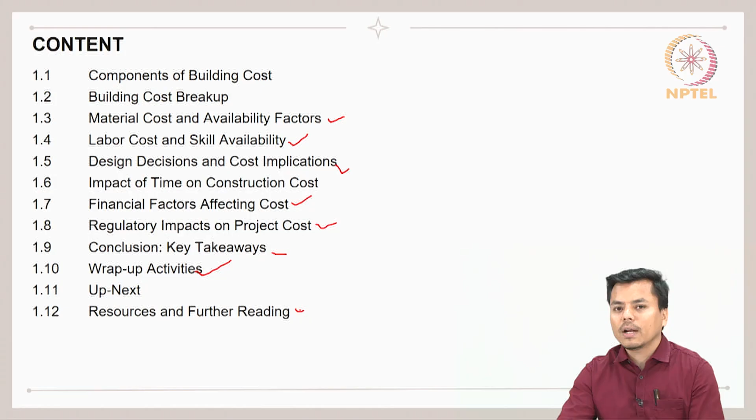Then financial factors that affect the cost, regulatory impacts, and then we will conclude this presentation with the summary and some wrap up activities at the end. Also I will try to give you a glimpse of the topics that will be covered in the next presentation. Thereafter some resources will be shared with you, which you can refer to and understand more on the particular topic.

To give you a recap of what was covered in the previous presentation, we emphasized low cost construction, and tried to understand the background: why low cost construction is needed and how it can be achieved without compromising safety, quality or building performance. Also we understood how rising demand and affordability gaps push the need for innovative construction solutions.

Then we also understood the concept of embodied energy and learnt that the hidden energy in material is a key factor in deciding the environmental impact of that particular material. So from that lecture you will have a greater understanding of the material to promote in a particular construction style.

Then the environmental impact of buildings was discussed, wherein different methods of construction or different practices were discussed. Then green and low cost solutions were discussed, and also the different rating systems that are available to determine the sustainability of any construction. That was also briefly discussed in the previous presentation.

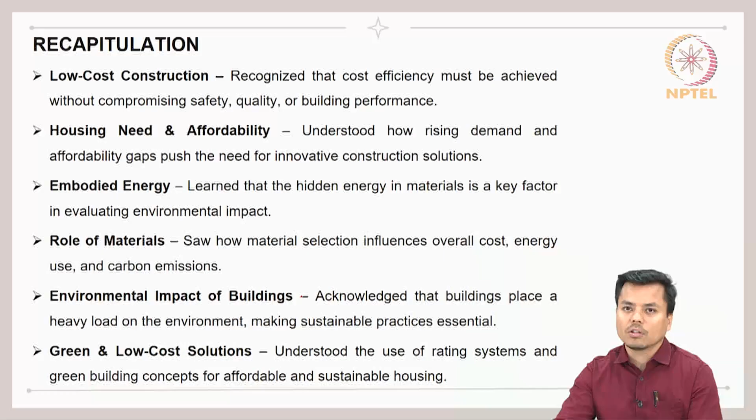Before this we had understood the need for low cost construction, and it was emphasized that the cost of construction is actually a major deciding factor in determining the affordability of a building. So let us now try to understand the components which decide affordability. The first and foremost, which has a higher share in the entire cost of construction, is the material cost, that is the raw materials used for construction.

Bricks, cement, steel, aggregates and finishes. These are some of the materials used extensively in construction, and they consume 50 to 60% of the entire cost. If we try to find and use alternate materials, like replacing cement and steel with locally available materials, possibly the material cost can be reduced by at least 20 to 30%.

The next is labor cost. It doesn't change much, but it is one of the components of the affordability of a building. For skilled, semi-skilled and unskilled workers together, the entire remuneration or salary being given to this labor is actually 20 to 30% of the entire cost of the building.

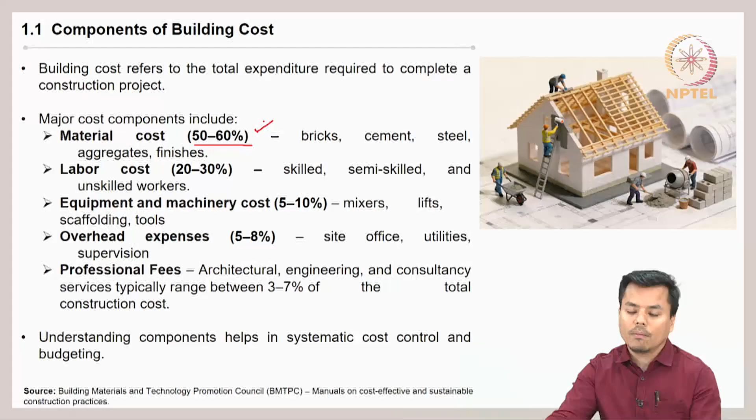Then the building cost breakup - the distribution of the total project cost. Typically, in a residential building, materials consume 50 to 65%, labor costs around 20 to 30%, equipment and formwork 5 to 10%, and contingencies 5 to 10%.

The cost breakup varies with building type. If you are constructing a small scale building with a simple design without fancy forms, the cost may be minimized. If the materials used are all locally available, the cost can also be minimized. If not, you have to bring materials from far off places, which increases construction cost.

Location is also an important factor. For example, constructing a building in plain areas versus high altitude areas - there is added extra cost while constructing in high altitude or extreme regions, like Leh and Ladakh, or Thar desert areas, or very dense forest areas. Projects built in isolated locations have extra added cost because there are no locally available shops from where you can purchase materials.

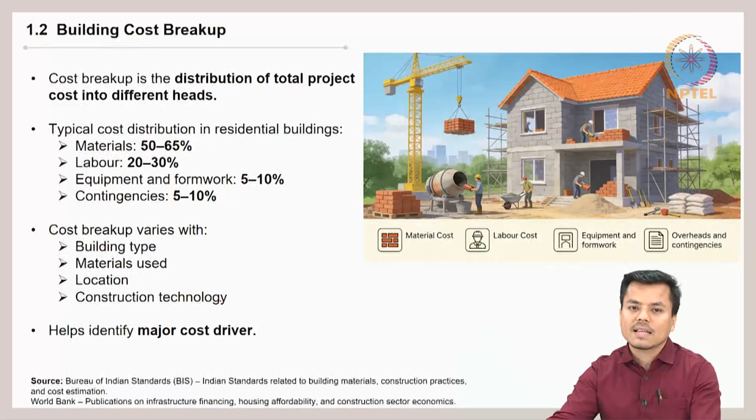So careful planning has to be done before the entire budget is prepared for the construction. With this analysis, it will help you decide the major cost driver of the project.

Talking about the material cost and availability factors from the previous slide, let us now understand it in more depth. The material cost is actually influenced by market price fluctuations.

For example, just now as I am recording, there is a war happening in Gulf nations. With that, there is difficulty in getting petroleum products and related materials in India, so the cost of steel and other associated materials like glass has significantly increased because of unavailability of specific raw materials.

So in that case, the market price fluctuates. But if that tension in the region is minimized, after a period of time the market price will gain, there will be no fluctuations, and it will be as it was earlier.

So that is where such conflicts and such sudden global issues create an impact on the market, and due to which the price fluctuates.

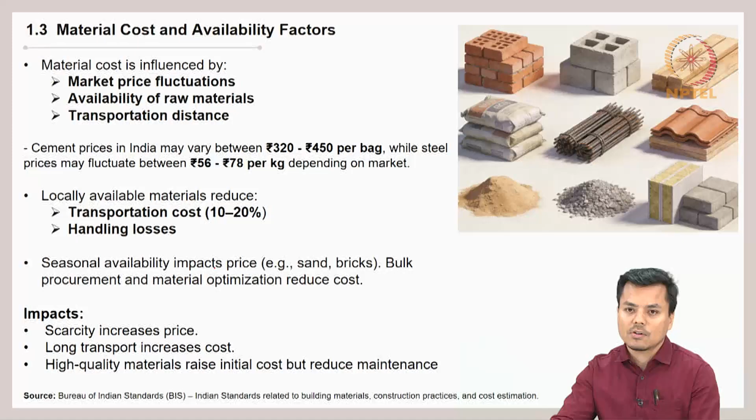That is what you have to understand. Then next is labor cost and skill availability of skilled labor. If there is a shortage of trained masons, then the labor wages increase.

Then regional wage rates vary from region to region. In regions where laborers are less available, the wage rates are higher. That is why in metro cities like Delhi, Mumbai, Bengaluru or Kolkata, the wage rate is very high for skilled labor compared to small towns and villages.

That is the reason, because there is a lot of construction happening, plus the cost associated with day-to-day spending is also very high in that region. Also, experts or laborers are not available locally, so you have to bring labor from other places, and that creates an imbalance in the wage rates.

Then next is productivity level. Skilled labor improves productivity. If you just use whatever labor is available, knowing they do not have expertise, a lot of mistakes may happen, and you may have to break the construction or demolish a part of a wall that is wrongly constructed, or a column that is wrongly constructed. So all that may happen.

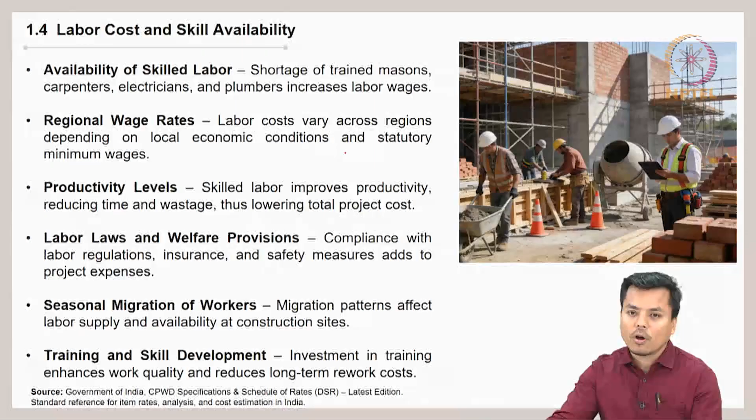Then training and skill development. Investment in training enhances work quality and reduces long term rework costs. If you can give formal training to laborers before a project, that will minimize some rework costs during the project. Then there are some design decisions and cost implications which have a major factor to play while minimizing the cost of construction.

The first is building form and geometry. If your building is very simple and can be easily designed, then in that context the cost of construction is lower compared to a very extravagant design with a lot of architectural features.

That will increase the cost of the project. So it depends on if you have good capital with you and you have to fulfill all your wishes, you can go ahead with the conventional way of construction. Low cost will not be a priority in that scenario, but where low cost is a priority and a factor to be considered, then possibly you may not be able to design something very extravagant, and sometimes the architectural features present may not be necessary.

Next is structural system selection, whether you are using RCC, steel, composite or load bearing systems. This affects the cost and also the construction time, so depending on that the cost is decided.

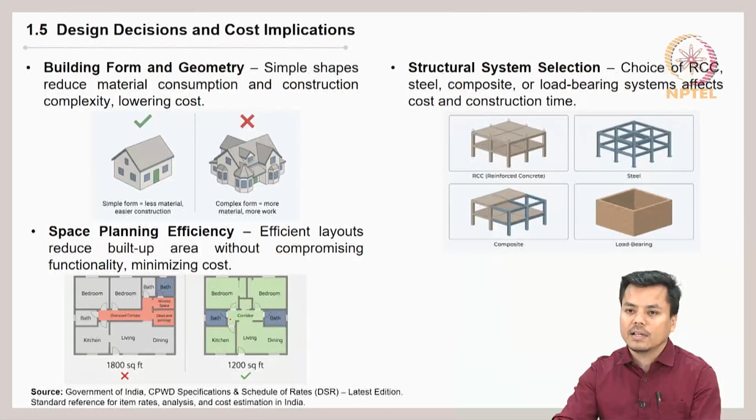The next is space planning efficiency. If you could design your space, for example as shown here, within a dedicated small space, you are able to have all the requirements of the client fulfilled. Possibly that will minimize the construction cost, because you are utilizing less built up area, with less wastage of spaces in terms of corridors and other circulation spaces inside the building.

Then other factors that decide construction cost are the choice of materials and finishes. With premium finishes, if you are using very high cost interior finishes, that will increase the cost of the project. If you are using sustainable design strategies like passive design, in the long term that will help minimize the cost of the building.

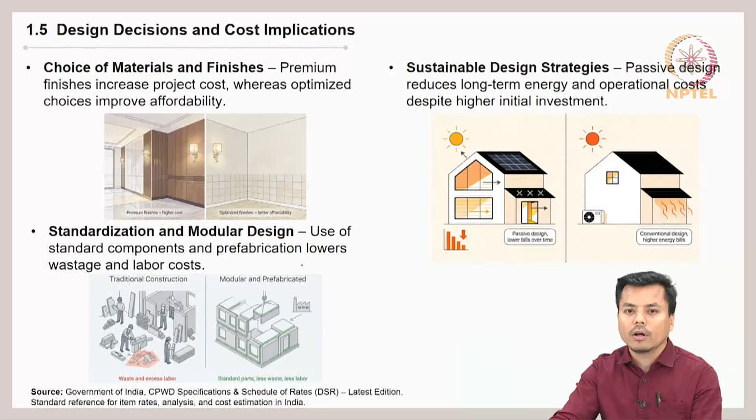Standardization and modular design, as I explained earlier, if you go for modular planning, or if you use prefab material, that is prefabricated material, then the cost of construction can be minimized.

Since the design decisions are understood, now we also have to understand the impact of time on construction cost. We have often seen in discussions in general public that a project which was supposed to be completed in 3 years gets extended for 5, 10, 15 years to complete.

And within that duration we also get to know that the cost of the project has doubled or sometimes tripled. For example, if a hospital was supposed to be designed within 5 years with a budget of around 50 crores, but if it is extended due to many issues, the cost of the project also increases, because the continuous use of machinery, continuous use of labor and associated expertise all adds to the cost of construction.

So if you are delaying the project, you are adding to the cost of construction by at least 10 to 15%. That is where proper planning of construction has to be done.

Then inflation and price escalation has to be understood. With this, at least 5 to 8% annually the cost of material increases. That is why generally it is targeted that at least for a small level of construction, it should be completed within 1 year. Beyond that, the cost of materials increases after a year, and there is a chance that you may have to suffer at least 5 to 8% annual difference.

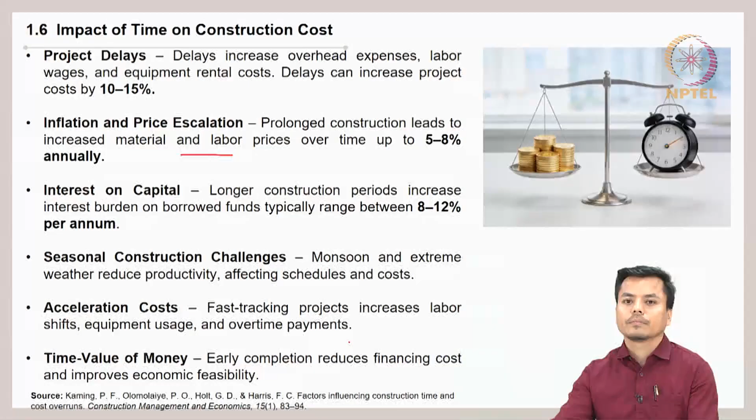Then the other factor to be considered is the financial factors, like interest rates. It increases month by month. Availability of credit, so that is also a question. If you are using loans, possibly you have to keep on paying the EMI of that construction if it is not finished in time. Cash flow management: efficient fund flow prevents work stoppages and avoids penalty costs.

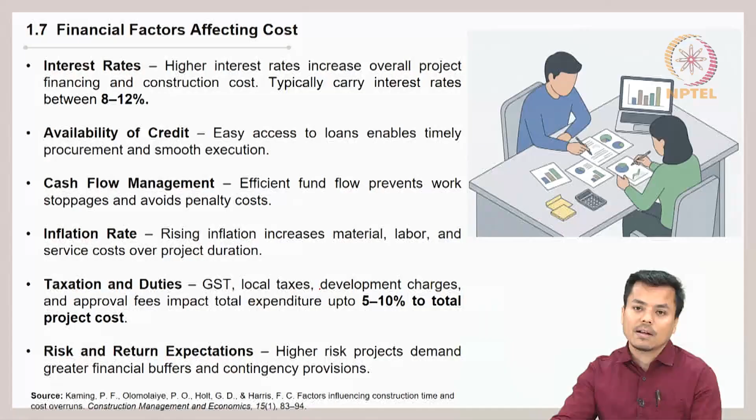That has to be ensured, that you are able to pay dues of the material and of the labor wages in time, or else they will stop working with dedicated interest and enthusiasm. So possibly then you may have to delay the project. Inflation rate: rising inflation increases material cost, labor cost and service cost. Taxation and duties, all these GST, local taxes, that has to be considered and has to be well thought in advance. Plus risk and return expectations have to be understood in case of financial factors of the cost.

Then the other factor that determines the cost of construction is regulatory impact, like building bylaws and development controls, like FAR, setbacks, height restrictions, all that has to be followed. If you do not follow these regulations, then possibly tomorrow if there is an inspection from the concerned building works committee, then you may have to pay fine for all the mistakes that you have done.

Environmental regulations, if these are not taken in advance, then due to litigation and all those court cases, your project may be delayed. Safety regulations, fire safety, structural safety, all that has to be ensured, or else it will delay the process, or at times it increases the construction expenditure also, but it is a good thing to do. Approval procedures and delays: lengthy approval process escalates cost. So that is why government is trying for a single window clearance for such projects, which minimizes delays in procedures.

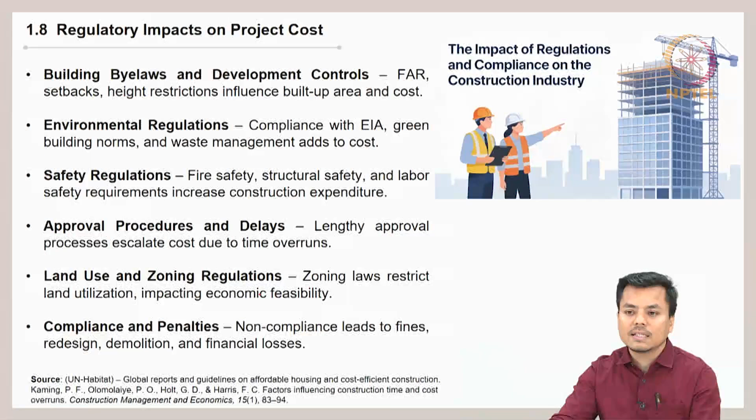Land use and zoning regulations, all this have to be understood, and where this project is going to be constructed, you have to have proper permission for constructing a building over there, or else it will go into litigation and then a lot of money is wasted in that. Compliance and penalties have to be understood for the particular project.

So to conclude the overall cost components and influencing factors, building cost is a multidimensional concept. It is not only thought that okay, the material cost is the majority, so I will always think of how I can reduce material cost. In that thought process, you may compromise on the quality of material, so that should not happen. That is why it is a multidimensional concept, and you have to think very well about all the materials and associated cost factors. Then efficient cost management requires holistic planning, integration with technical, economic and managerial considerations.

Material and labor availability significantly affects project feasibility, timelines and overall expenditure. Design decisions play a critical role in cost optimization, where simplicity, standardization, as I was mentioning, modular planning, all this helps you minimize the cost.

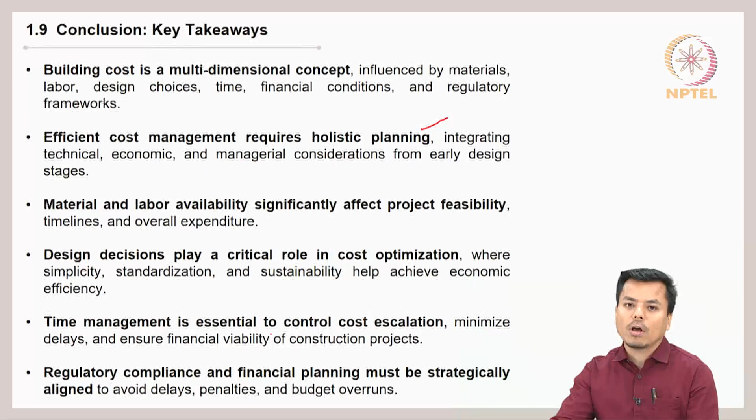Time management is essential, or else we have seen how, if we do not follow time restrictions for a project, it increases the cost of the project, because many things are associated with it: inflation, the interest rate, the capital that is borrowed. So all that will put further burden on the project cost. Regulatory compliance and financial planning must be strategically aligned to avoid delays, penalties and budget overruns for the project.

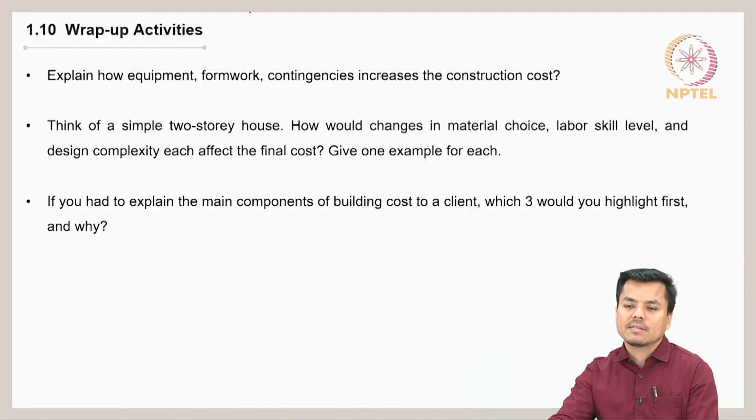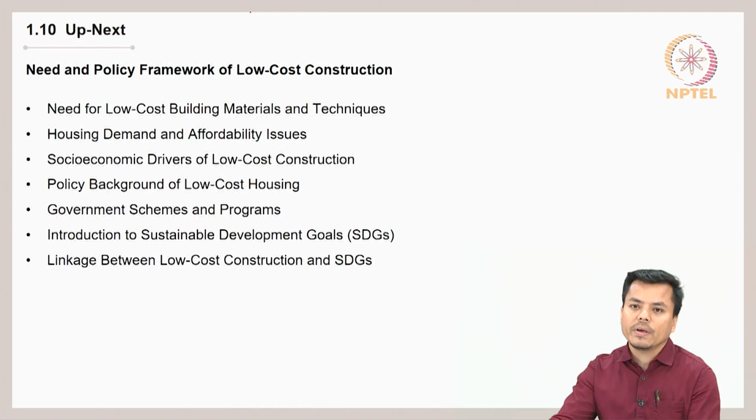So to perform some activities and think on some questions after the lecture, these are some activities that are suggested. You can complete this once the lecture is over. In our next presentation, we will focus on need and policy framework of low cost construction, and the topics are listed here which will be focused in that presentation.

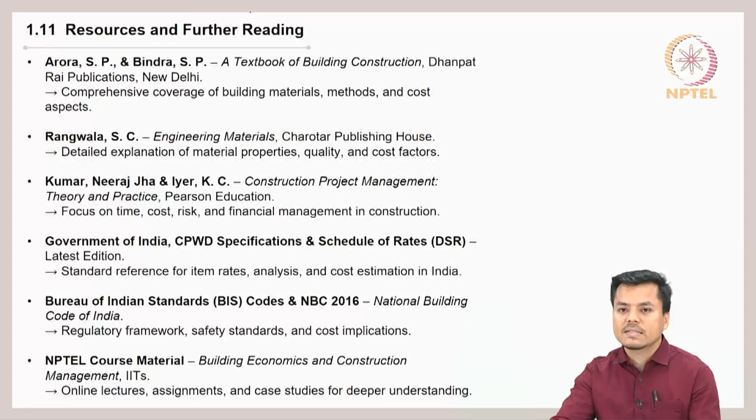So these are some resources which can be referred for this presentation to understand more in depth about cost components and the influencing factors. So with this, I would like to conclude my presentation, and I hope you were able to understand details about cost components and the influencing factors for any building construction.